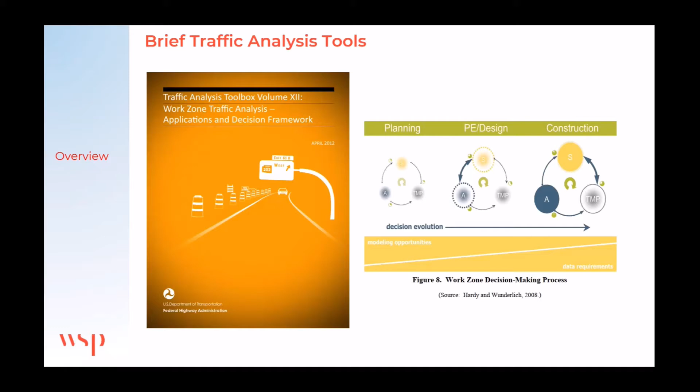I did want to mention that this is discussed in the Traffic Analysis Toolbox Volume 12 about work zone analysis. On the right, you can see it doesn't necessarily mean that you have to use a simulation tool, but in this case, for a couple reasons, it was selected. But you do sometimes need to look at your TCP in planning, during your PE and design, and then again maybe during construction. And that's what made this particular project a little interesting.

So just to give context, Texas is a big state. Here is Houston, and this particular project is about 2 hours east of Houston, closer to the Louisiana border, in a town called Port Arthur. You've probably never heard of it, but there are major chemical plants, not in the oil world, but on the chemical side. So there's a lot of traffic that comes in and out of these locations, for the port, obviously, and then to deliver and send out product.

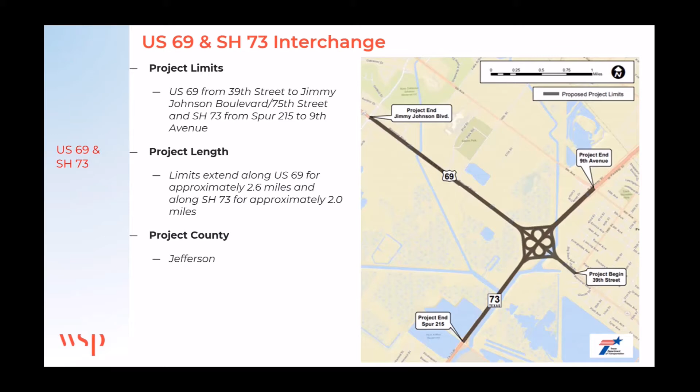This was our study area, a relatively small study, a cloverleaf, one of very few still left, especially in Texas, on an excellent corridor with US 69, typically two lanes in each direction, a highway not up to freeway yet, and FM 73, very similar as well, and both of these provide direct access to the port and to the chemical plants.

The existing cloverleaf: ultimately TxDOT wanted to improve this particular interchange, and they looked at a lot of different analyses. We were given the project after the decision of what the project was going to be, and so you'll see that here. We'll look at some of that history.

They did look at a traditional interchange with direct connectors, and if you've ever been to Texas, our direct connectors are very, very large. They're not just a simple little DC. I should have had a picture to give context, but some of our direct connectors can be half a mile long to get rid of that weaving.

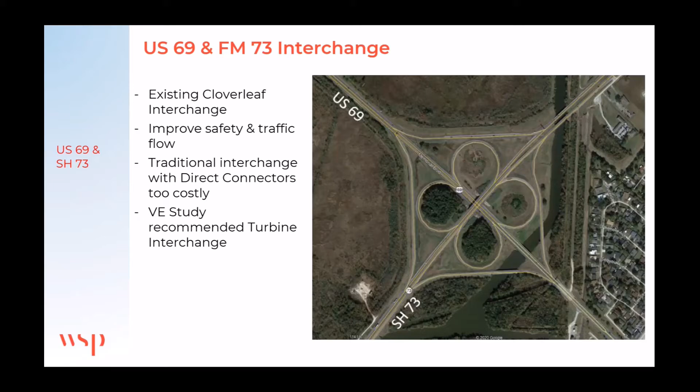And so it becomes a very costly interchange. And so that was one of the reasons why when they did the VE study, they said, we can't imagine spending 60 or 70 million on a DC connector interchange.

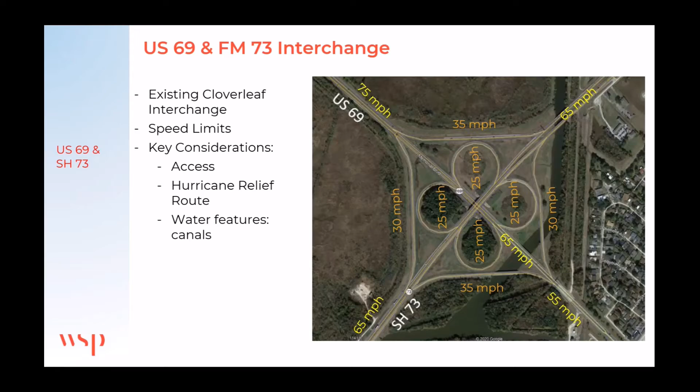The existing interchange did have some very poor levels of service. Obviously, you can imagine with cloverleaf speeds and the volumes on the ramps, they're obviously the highest here, where you create a very large weave, and that creates safety and congestion problems. And you can see 12,000 on this ramp here, 14,000 on one of the ramps that are coming here, and these are existing. These would have been 2019 volumes before the pandemic.

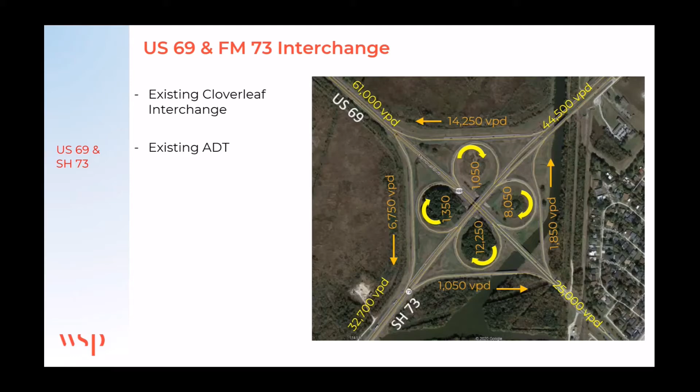So we obviously then were given the project to increase and forecast the volumes. I don't actually show that in here, but I just wanted to mention that the analyses that you're going to see and we discussed are based on the future.

So TxDOT once again wanted to reconfigure the cloverleaf interchange, and what they ultimately decided on was a turbine configuration, which there aren't very many of around. You'll see here in a minute, but those really addressed the questions, as Chong said the other day: why are you doing the simulation? What's the project for? And so in this case, the turbine interchange met some direct connectors, but not the large big ones that we typically would think of.

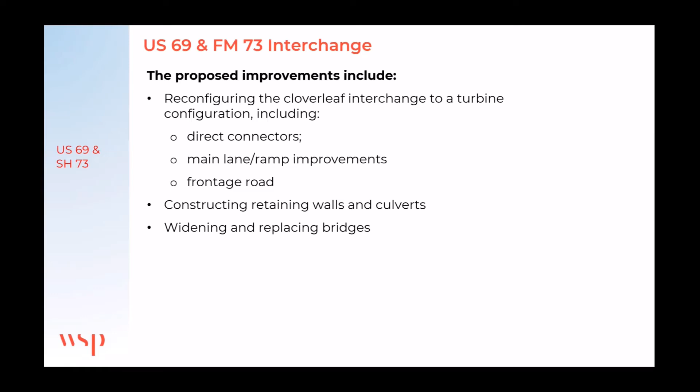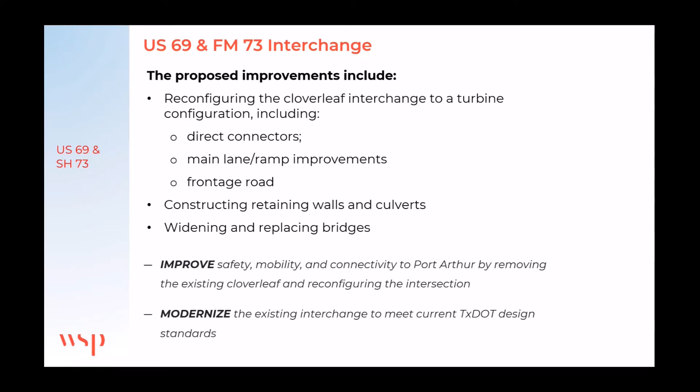Obtained the frontage road. We in Texas like frontage roads, so we included those. And then more from the design perspective, constructing retaining walls and your typical elements for construction on a project. Mainly, it was to improve safety and mobility and connectivity to Port Arthur, and then to modernize the interchange to current TxDOT standards.

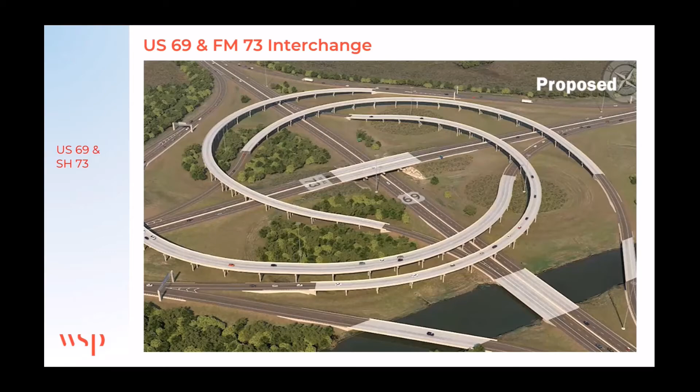The music's great, so we'll just let it go.

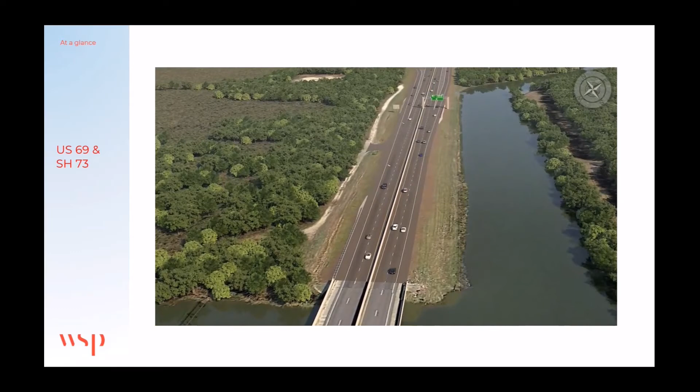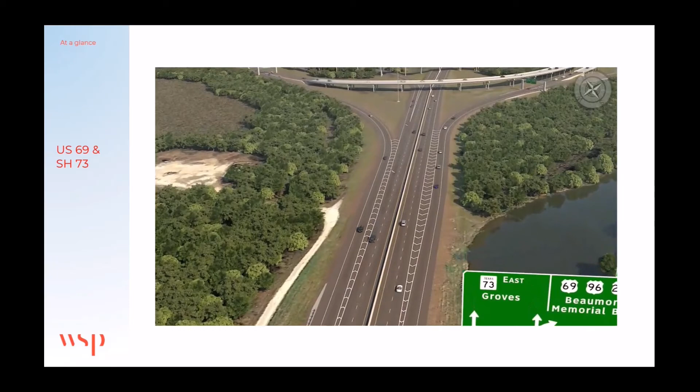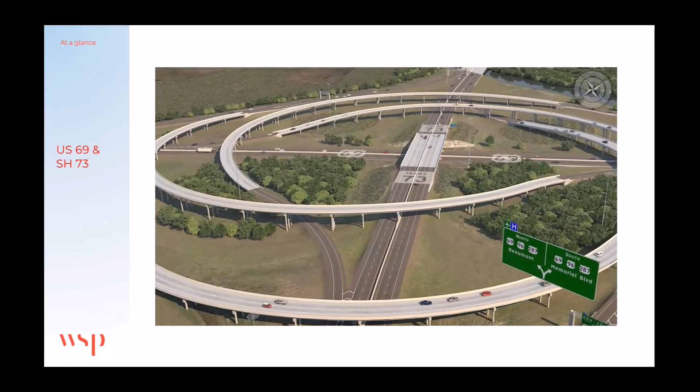So this is one of the features within Vissim that gives us the ability to take the trajectory info and then bring that into an animation. And so you can see this does take more than half a day, as was mentioned earlier. But for public involvement, this is a very important tool. And so you can see these are actual trajectories from Vissim put onto the animation itself.

Well, and then our visualization experts can put in the signing and everything to really give it that full feel. And so when they are talking to maybe the chemical plants or some of those other stakeholders, they can see a little bit more perspective. They do get the elevation of the bridges and where everything is going to be in a much more realistic way.

And so I know PTV Vissim, I always look at it the same, they've made that ability a lot easier than it used to be. So it is something that sometimes, if you have the opportunity and you really need to sell a project, this is another feature. Maybe one day they'll incorporate it all, but that's probably going to take a lot.

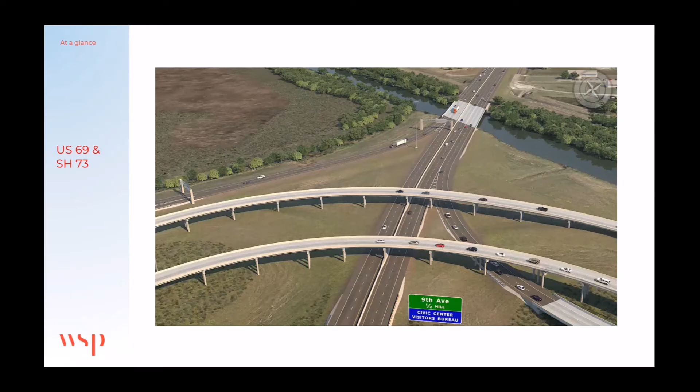So we don't want to watch it again.

And so one of the other elements: back in the old days, we didn't have these pretty little figures that you could do within Vissim. And so, as I mentioned earlier in one of the presentations yesterday, I think, some of these are nice enough that you can put them in an appendix. You can add them in a PowerPoint like you see here, without having to go and create all of your figures again. And so this just gives a very quick look at density.

Since both of these are freeway type roadways, very quickly you can tell what the speeds of the turbine were at the different times. And yes, you will see that there is a ramp that is still not performing great in the year 2049. And so there were some additional modifications that we had to make.

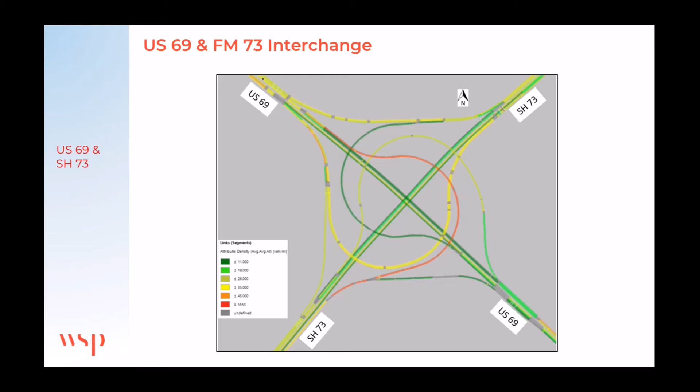So that's another thing that simulation helps, which we in this room know, but just to reiterate that. And so I'm getting to the TCP.

I know you're probably thinking, but I still have time because we only had 3 presentations, so I've got what, half hour still? No, I'm kidding.

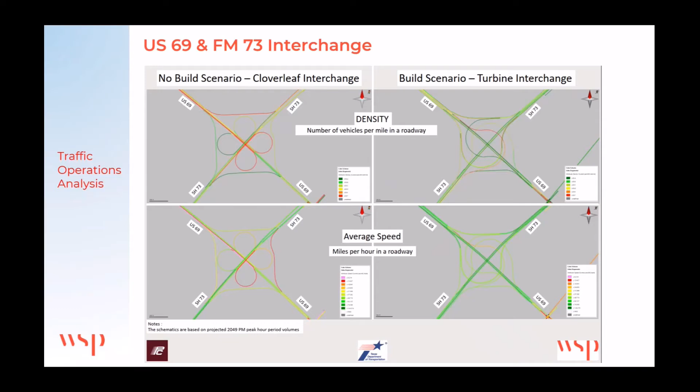So in this case, just really quick, this shows you the no build scenario, and it's very easy to create some very nice graphics all within the Vissim platform. So that really helps us to not have to create and keep redoing graphics. But you can see very easily that everything's green. Everyone knows that that's good. So you can put the legend there, and it's a very easy way to show.

Okay, so that was looking at the existing cloverleaf, changing it to a turbine. That was the main focus of the project. And what TxDOT said is, hey, we want to save money and build this project. We don't want to belabor it and have it go out for multiple years. As we all know, the quicker you can shut things down and crank it out, the better off it'll be.

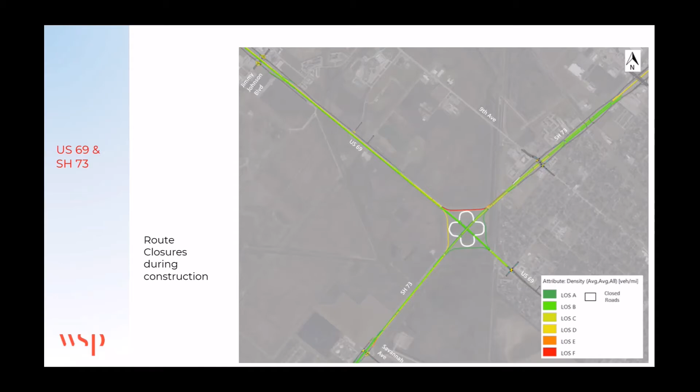And so this is another feature of having the scenario manager. This was a great tool to be able to code those and filter them through, and be able to do your base network, your base geometry once you've got it calibrated. And once again, we're looking at the existing network. We've already done the proposed and we're finished. Well, now let's look back at that calibrated model that we spent time on.

What could happen? What things could we do to let TxDOT know it's going to work or it's not going to work? And so this just further goes through creating modifications and then creating those different scenarios as you've seen here in the past. And I think we were lucky; when we started this project, I don't think the scenario manager was in, and by the time we got to this task, we were able to take advantage of it.

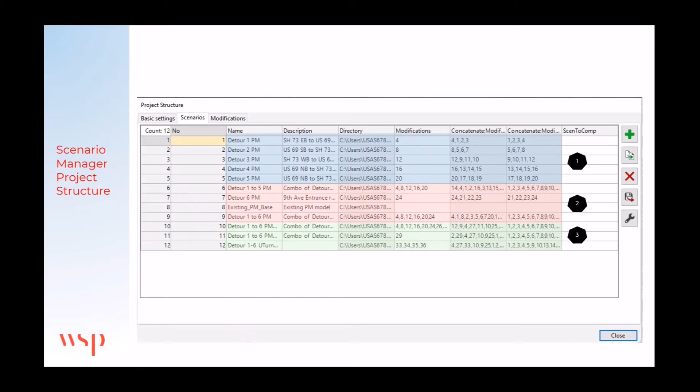And so this is just a list of some of the names, looking at Detour 1. We ended up doing the PM because that was the worst case in all scenarios. And then you have a description of the combination of detours. And so you could really test something. If the client said, well, hey, what about if we do 3 and 4? You could do that. Instead of, well, I'll have to get back with you in a couple days, you'll be able to do it much quicker.

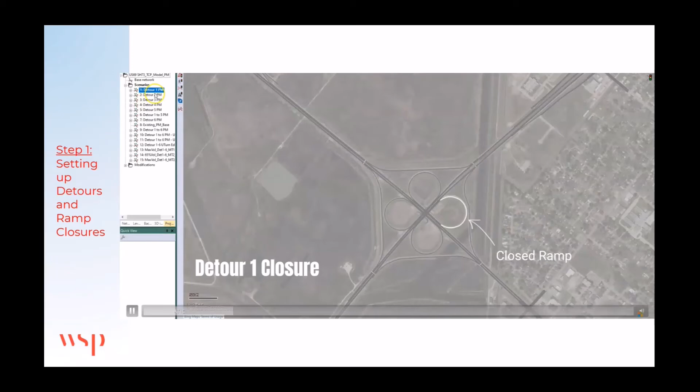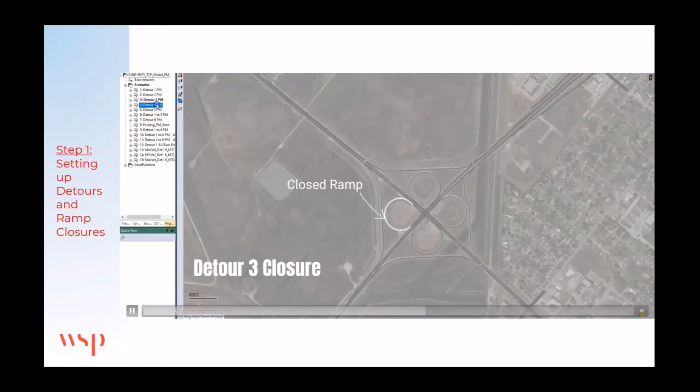And so Akshay created this nice little video, once again, to show the scenario manager up at the top, showing down here that it's closing a ramp, just to showcase it for those that maybe don't use it often. And so you can build upon each other. It made it very easy to go back in time and check something. I think that's it.

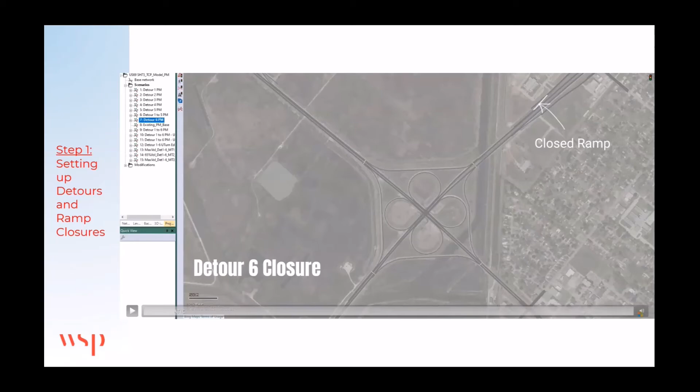So in this particular case, I think there's one more. I think that one more. Maybe it went to the same thing. Sorry.

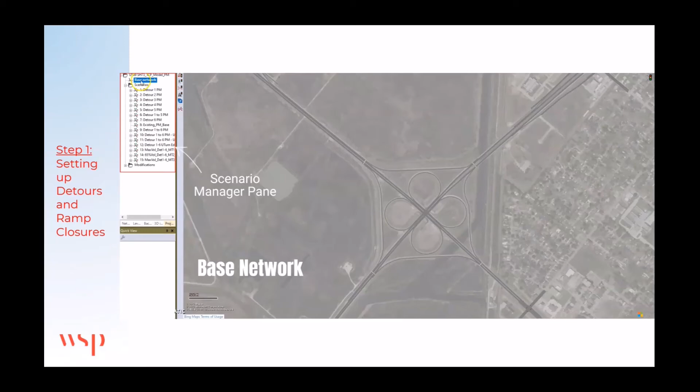We kept reiterating getting CMS, changeable message signs, out in the field and telling people to go another way. And so that was in combination with telling people to divert. Also, this particular Savannah interchange did not have a standalone U-turn. And so that was something that was recommended: add in the U-turn so people can make that movement without going through the actual interchange.

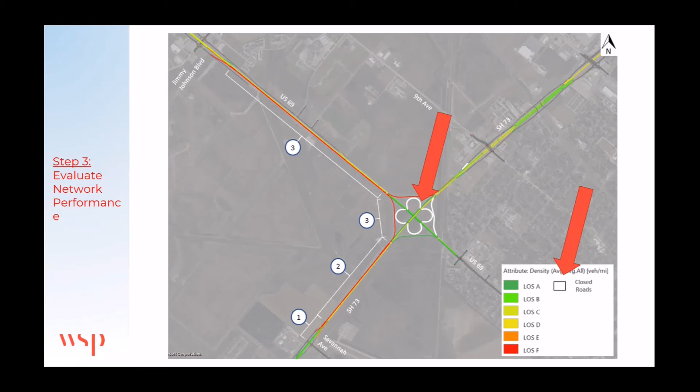And so by doing that and saying that, let's say 30% of the traffic was going to go on a detour, for example, and we did some signal timing and we added the U-turn, you could see that we did get some improvements throughout the corridor in that regard. But it was that ability to not only know that it's going to be bad, but what are some improvements that we could make. And so that was for the big interchange.

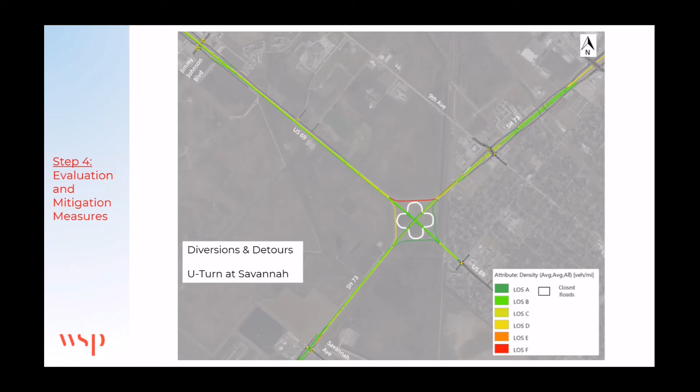And then as they were just about ready to start the actual construction of the interchange and some other items, this is the Savannah interchange, which is right on 73. One of the large chemical plants is right in this area down here. When they do construction in Texas, they do construction very large. And so when they do construction on these chemical plants, they're massive. This particular chemical plant was going to send out construction traffic of another 1,000 vehicles added to

the network. And so they came back so they could tell the chemical plant that, obviously, if you put all this traffic here, it's going to overload the interchange, and what other improvements could we make? And once again, to show the chemical plant that you really need to do some shuttles and some other proactive improvements to be able to handle that traffic.

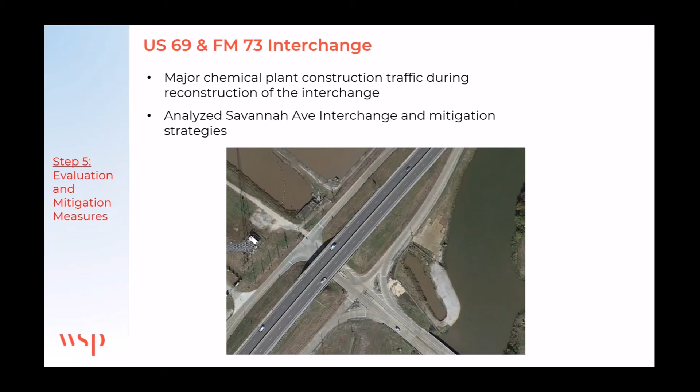But what was nice is they were being proactive. Whatever did happen, we don't know yet, because I don't think they've fully started that yet, but they are doing some of the updates to this interchange ahead of time before they close the actual interchange itself. And so this is the last.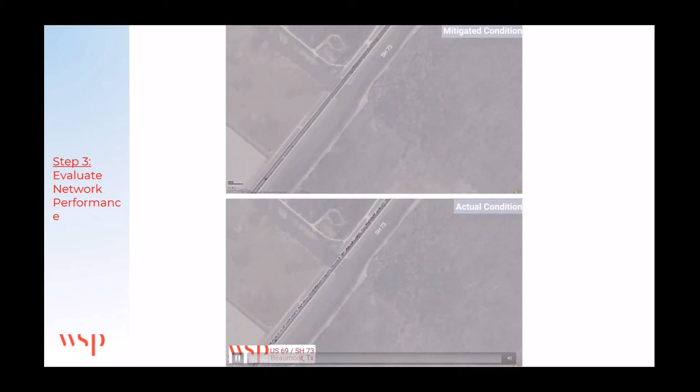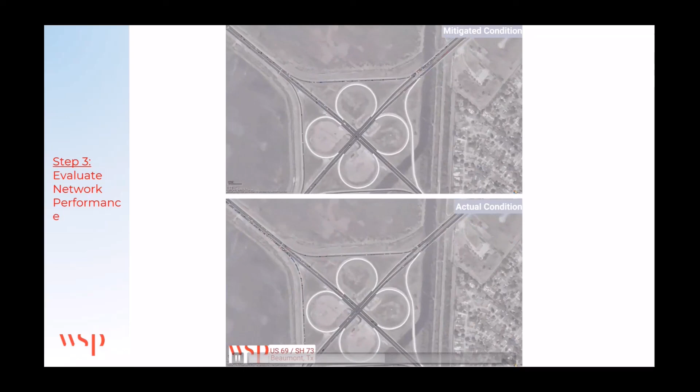Yeah, I guess you can see. So down below was going to be the congestion that was going to occur. And then as you see up above, when you do the U-turn and, I don't recall the diversion that we had anticipated to get the level of service down into reasonable. But you can see, with those ramps closed and with a diversion, that was going to have to be part of their plan. And obviously the construction component just added even more traffic to the mix.

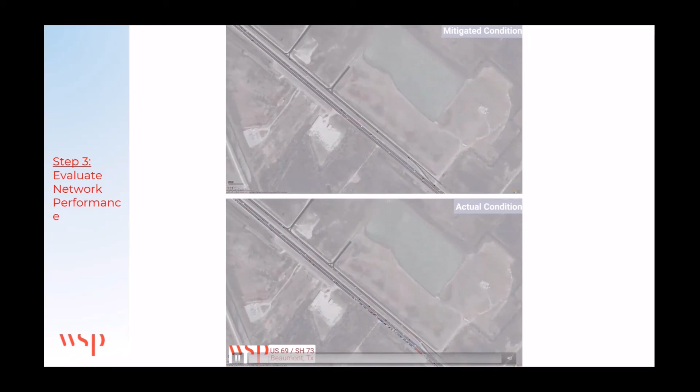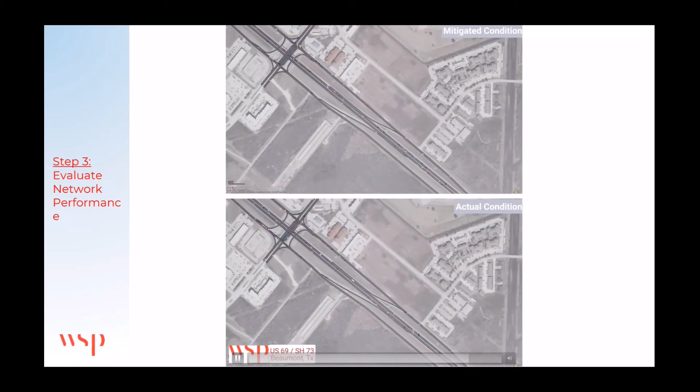They actually upgraded some of the signal equipment at the interchange, even though that was only going to do a certain amount. But at least they were being proactive and trying to get some of those things ahead of time. So that's that. And then I think that brings us, if it will let me go.

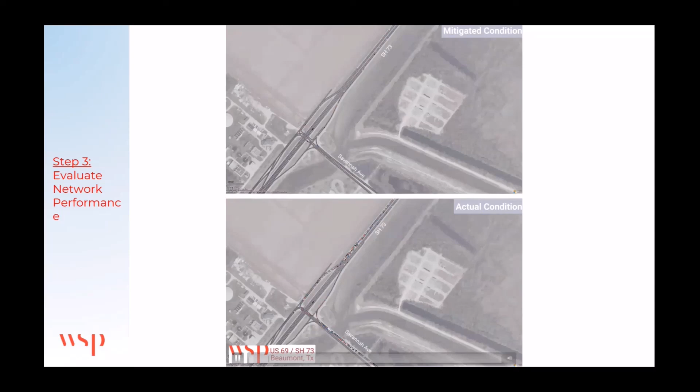There. So as I said, no earth-shattering things here, but just once again, remembering that sometimes when we get engrossed in different things, remember bringing in your vehicle trajectories and creating a good animation can go a long way with your different policy makers. But obviously go through that during the scoping phase. And if it comes up later, it is something that you can do if you have the ability to.

We all understand the importance of simulation in this room, so I won't reiterate that. Just remember the graphics that are inside. Most everyone in this room obviously knows that as well. But sometimes, Vissim is constantly updating and improving, and whoever knew that we would have 2023 coming out. For those of us who've been using Vissim, that just seems like a lot. So just keep remembering those features we forget about because they're coming out with great

new and advanced ones. But I just want to point out that TCP is an important thing, especially on design-build projects. We do those a lot, where we require the contractors to actually do a Vissim network to show the owner that, hey, if you're going to do this and this, then you're either not going to be allowed to, or you're going to pay a penalty for that. So that's just another component of that MOT strategy when you get into these big, highly congested corridors that have, like we mentioned earlier, 212,000 vehicles.